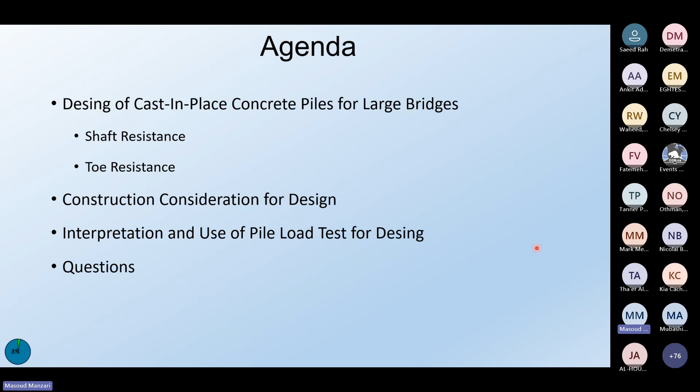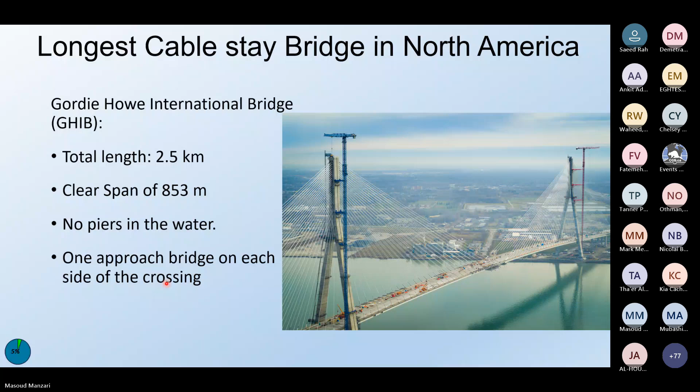The first project we're going to use is the Gordie Howe International Bridge, the longest cable-stayed bridge in North America. It's practically 2.5 kilometers long from end to end, with a clear span of 853 meters. There's no pier in the water, as you can see here, and there is one approach on each side of the crossing. It connects Canada in Windsor to the US at Detroit.

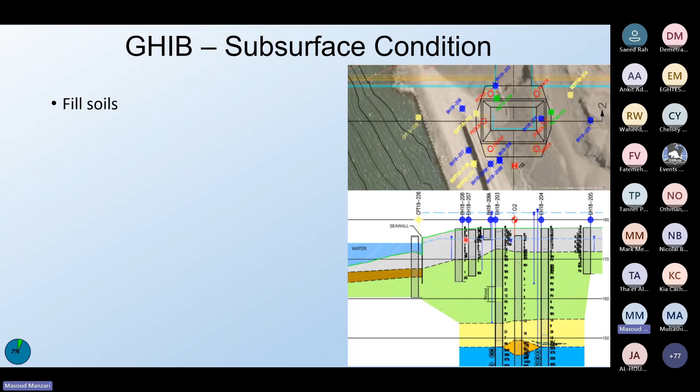The subsurface condition practically consists of man-made fill. This is one example on the Canadian side, and then very soft to very stiff, but predominantly very soft to firm clay, shown by green here, which extends all the way to 20 to 21 to 25 meter depth. There is 1 to 2 meters thick of hardpan, in this case compact sand. In some areas it's silty clay, till, and then it's all underlain by limestone bedrock.

Here is a sample of the tip resistance of the piezocone. As you can see, in the clay it's generally very soft to firm.

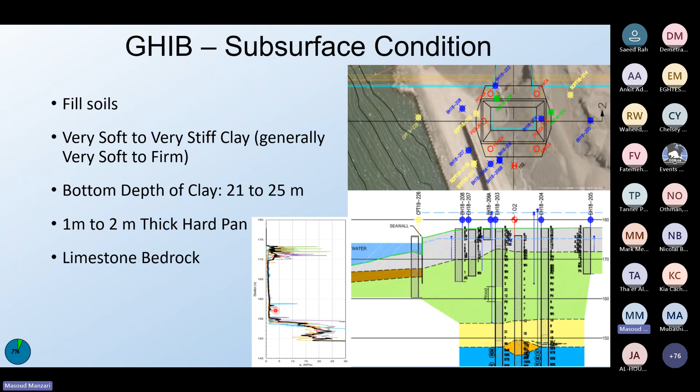The bridge has 2 main towers. Each tower is 220 meters high. Each tower has 2 legs, and each leg has 1 pile cap, supported by 6 piles. These are cast-in-place drilled piles.

On the Canadian side, the piles are 3.16 meters in diameter in soil and 3 meters in rock. On the US side, 2.92 meters in soil and 2.85 meters in rock. These differences are based on the availability of contractors' tools, since the contractor on the US side and the Canadian side were 2 different companies.

It was all designed by myself, but these minor detail changes are not a design related issue, it's a construction practicality situation.

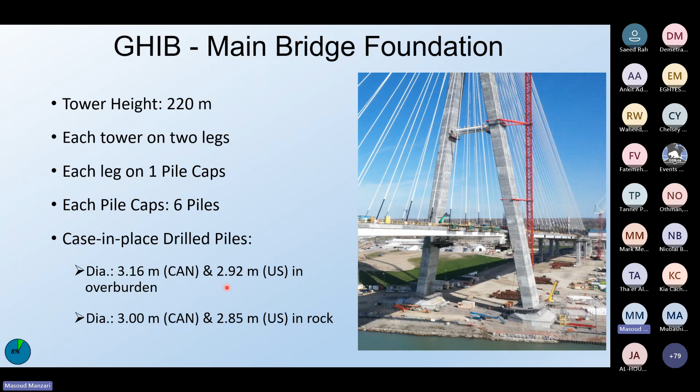The piles are about 36 meters long, and as I mentioned, about 30 meters of it is practically overburden with mostly fill and soft clay. The rock socket on the Canadian side is 4.5 meters long, and on the US side is 7 meters long, which we'll get to in the future, why that happened.

The design bearing capacity of each pile is 260 meganewtons factored in compression and 7 meganewtons factored in tension. The design assumes that all the resistance, whether in compression or tension, comes from the rock socket, not the soil. The soil provides lateral resistance.

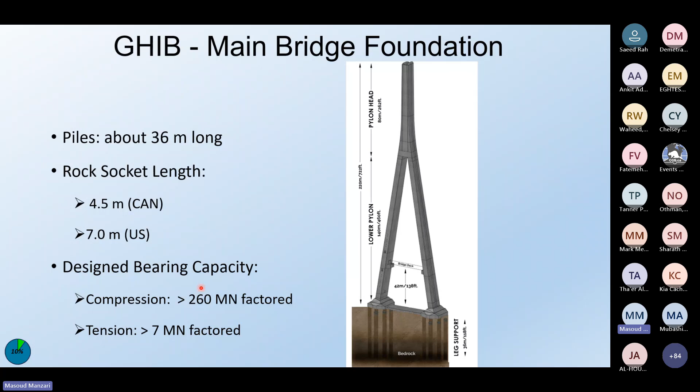To give you some idea about what it takes to construct large diameter piles like this, I'm going to quickly go through a few pictures of the construction stage just to get a feel for it.

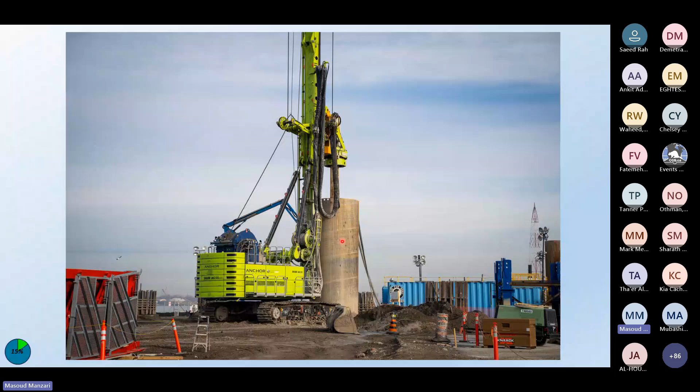Here you can see the height of the steel casing, which was used because we have artesian water, and we needed to make sure the fluid inside stayed above the groundwater level, meaning it had to be higher than the artesian pressure. That's the scale of the steel casing, this one for the pilot test.

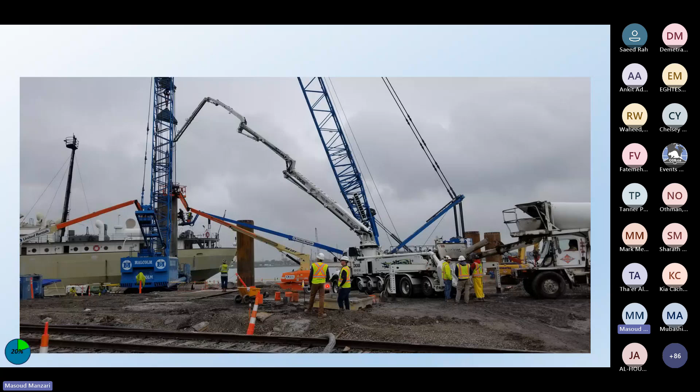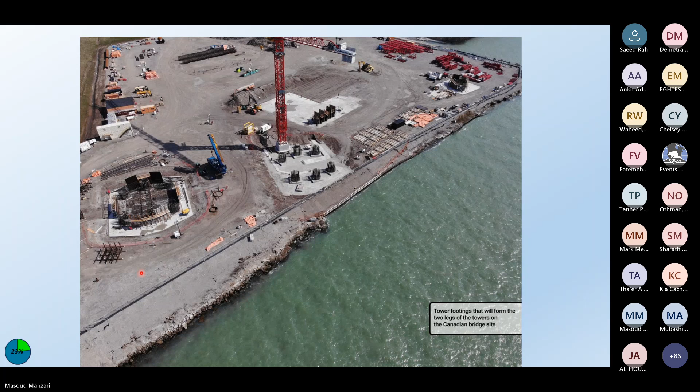You may see the O-cell test here, which we'll get to later. These are from actual construction, showing what's required for slurry and slurry recirculation, and what it takes to place the concrete inside. Here are a few piles during excavation, completed, and this one completed and cured. That's an overview of the pile caps, almost all completed.

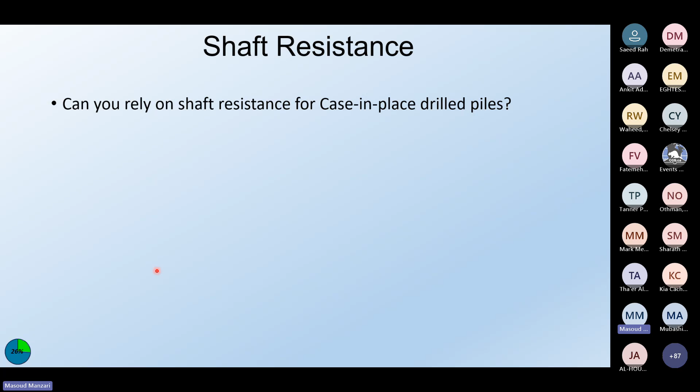Now we're going to discuss shaft resistance. Can you rely on shaft resistance for cast-in-place drilled piles? This question may sound ridiculous to some, who say of course we can rely on it. But I've had enough conversations with people who genuinely believe you cannot rely on shaft resistance for cast-in-place drilled piles in soil, because they believe drilling causes stress release and therefore you cannot rely on shaft friction for drilled piles. This is not a correct statement, and I can see where people are coming from.

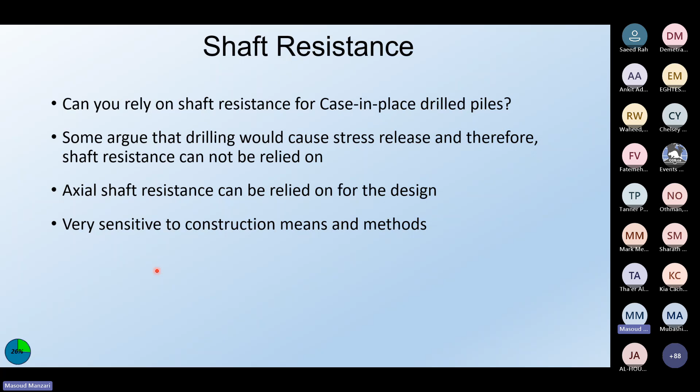I'll show a couple of examples of how things could go wrong, but you can easily rely on shaft friction. Shaft friction is very sensitive to construction means and methods compared with toe resistance. But in general, for equivalent load resistance between toe resistance and shaft friction, you get less settlement, and it is less sensitive to imperfections of the bedrock below the toe.

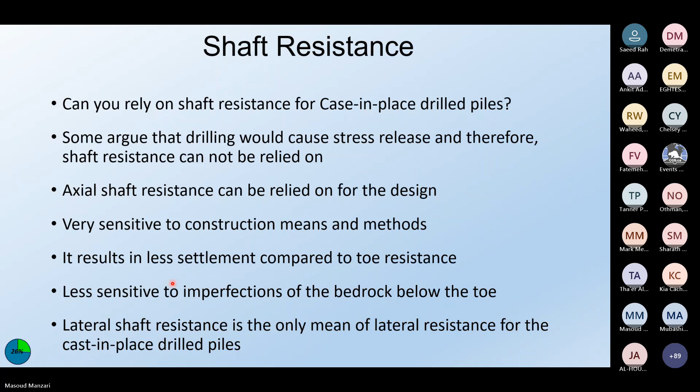And lateral, shaft resistance provides lateral resistance for cast-in-place piles.

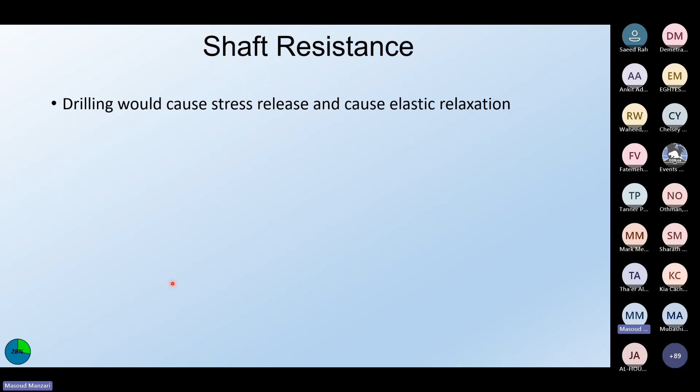Yes, it is correct that drilling causes a stress release and elastic relaxation. The key point here is elastic relaxation. But all of that gets compensated by the pressure of concrete.

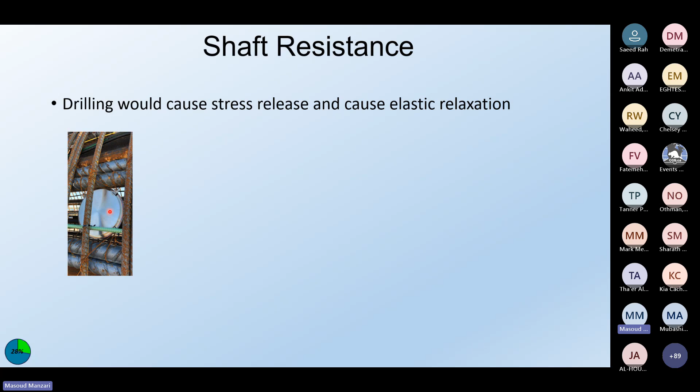For a couple of projects, we installed pressure cells inside the steel cage, and this graph shows what the pressure cell recorded. This high pressure here is practically when the steel cage was installed inside the drilled shaft. This is the hydrostatic pressure of water or slurry at that height.

After a few hours, concrete placement starts and the pressure increases. If you look at the angle of this pressure increase, it's very consistent with concrete having full fluid behavior. When you place the concrete, it applies a horizontal stress equivalent to a fluid with a density of 24 kilonewtons per cubic meter, which is even more than any horizontal stress already in the soil. It completely recovers the stress release.

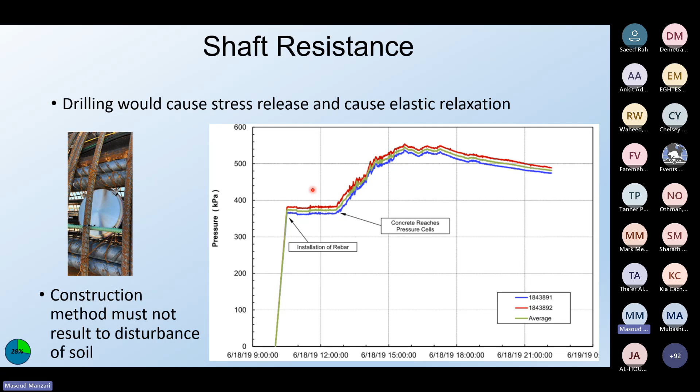In this case, by the time the concrete placement is finished and the concrete starts curing, you get some reduction in stress due to shrinkage. Another point to convey is this liquid behavior lasted for many, many hours, which we'll explain in the next slide. But as long as the construction means and method don't disturb the soil matrix, and we only have elastic relaxation, the pressure of concrete recovers all the stress release, and you get full shaft friction.

What is important is you don't disturb the soil, and also your concrete has the right workability. Plus, the concrete has the right workability retention, meaning the concrete at the bottom is still fluid by the time you finish placing all the concrete at the top. That's very important, and I'm going to show you an extreme case of the lack of workability or workability retention.

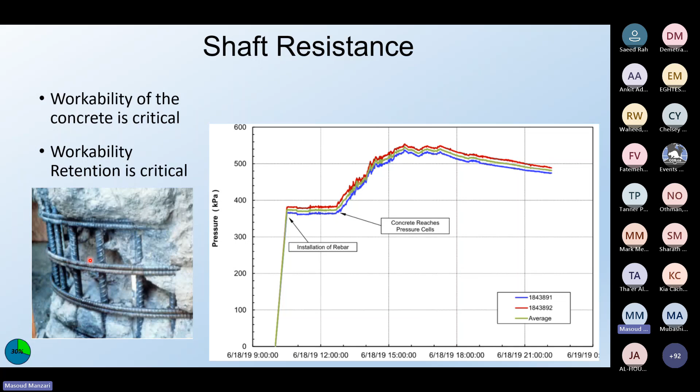Is if the concrete is not workable enough to pass through the cage. This is an example - you don't have any shaft friction. Therefore, yes, you can rely on the shaft friction, but that's subject to proper construction means and method.

Shaft resistance in soil and rock. When it comes to the shaft resistance in soil, permanent casing, even if it doesn't have overcut, it still leads to lower axial shaft resistance. And one reason is you don't get the recovery of the stress from the concrete.

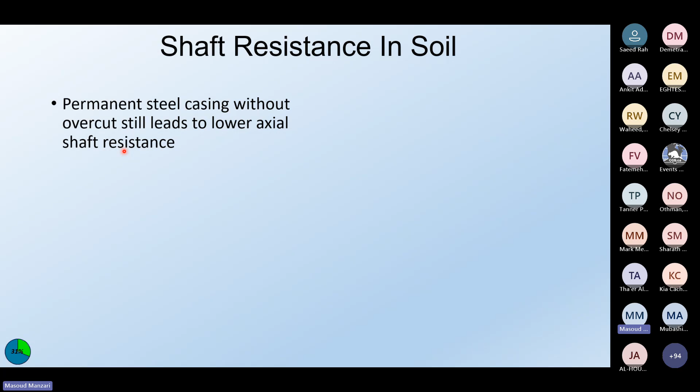Here is one example. We had the pile load test in the project. These values are the actual shaft resistance within the soil when we have the steel casing, even without any overcut. And these two are two conventional methods to establish the shaft friction in the similar soil with the same geotechnical properties. As you can see, the steel casing, the permanent steel casing has reduced the shaft friction considerably. And then using a permanent steel casing with overcut, it's an absolute no-no because it completely ruins your shaft friction and it softens your lateral behavior.

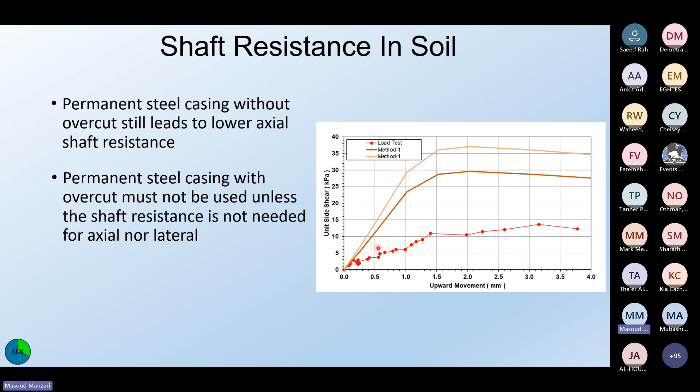Now, when it comes to the shaft friction, something that affects it after everything else is taken care of, meaning the workability and everything else - another item that affects the shaft friction and ties to the construction means and method is the roughness of the drilled shaft, meaning the rougher the drilled shaft, the sidewalls, the higher shaft friction you get. This is shown in here.

Both theoretical, which is this equation, and actual test, and it showed itself as piles having this identical roughness versus having different diameter. What does this translate to - the shaft reduction, ultimate shaft friction reduces as the diameter increases, assuming the same roughness.

And here is the ratio between the production shaft to the test shaft. As you can see, when it is less than 1, as the test shaft to production shaft diameter is less than 1, the roughness of the drilled shaft, the effect of the roughness in the drilled shaft in the bedrock is more than the effect on soil.

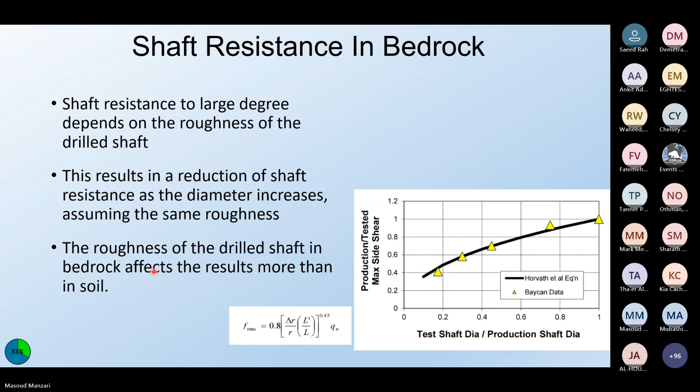I'm going to use another project. These beautiful bridges are part of the Portland project in Toronto. There were 4 bridges constructed with 3 different contractors. Therefore, we have one pile load test for this bridge done by one contractor, another pile load test at this location to cover 2 bridges, and another pile load test for a different contractor for a different bridge.

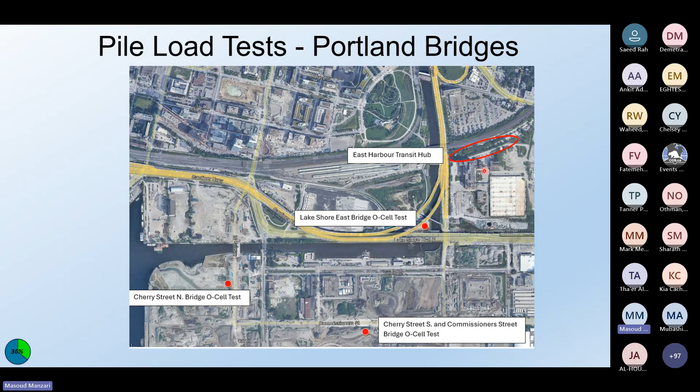And I got the result of a pile load test for a different project from a friend, and we're going to compare this in here. Therefore, we have 4 pile load tests. These 3 that I was involved with are done by 3 different contractors, 3 different equipments. I can tell you even 3 different tooling to drill the holes, but they've all been constructed with the strict specification. Therefore, everything you can say was done properly.

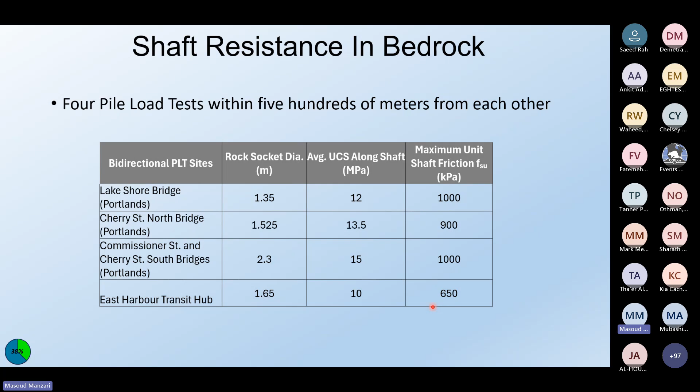And as you can see, the pile load tests are 500 meters from each other. For these 3 where the construction was very consistent, the ultimate shaft friction is almost identical for all practical purposes. The UCS is very close for these 3 locations. For the 4th project, the UCS is less, and we get even slightly less ultimate shaft friction in here. This might have something to do with the construction means and method effect. Therefore, the shaft friction is tied to the means and method a lot - to the tooling, to the roughness, the workability, and all come to the effect.

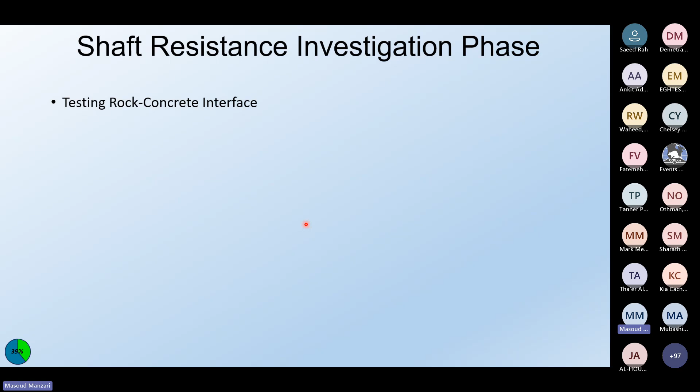Now, during the investigation phase for some of these projects, we actually started developing a test, as far as we know, for the first time - a test to study the friction and the resistance between the concrete and the rock. In this test, we took a rock core, cut it in half, in a vertical line, cast concrete on it, and then started putting this sample in a direct shear test, like that, and started shearing it to get us some idea about the ultimate friction between the rock-concrete interface.

And the idea is when you do the saw cut, that's almost the lower bound of roughness you get in your rock socket. During the actual construction, we expect to have higher roughness.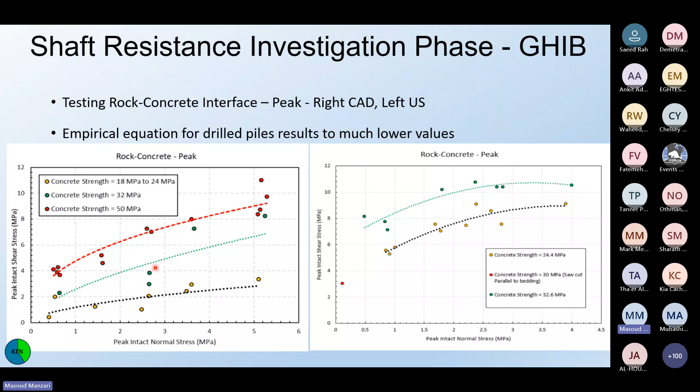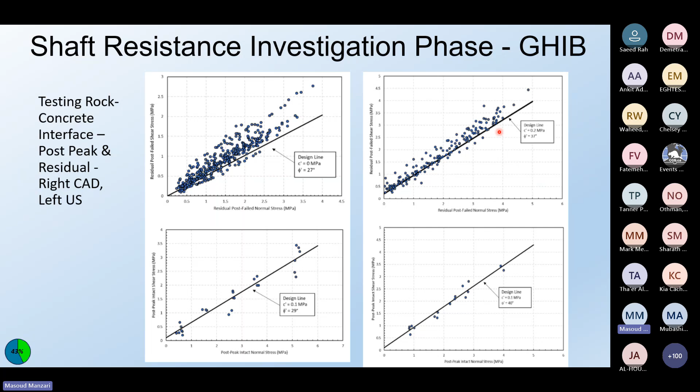The test that I mentioned was done, and also the residual state. As you can see, again, there is a big difference between the post-peak on the Canadian side and the US side. Between post-peak and residual, there is a 2 to 3 degree reduction in the friction. We use all of that in establishing the design, and I'm going to get to how it compared with the actual results.

Now, on the toe resistance - again, I've heard some of my colleagues in the past say you cannot rely on the toe resistance. Why? Because they say in sandy soil, you disturb the soil, you get almost no resistance at the toe. Or some people are worried that you can't verify the cleaning at the base. I think most people think from the age when we sent an inspector inside the drilled shaft to inspect the base - that doesn't happen anymore.

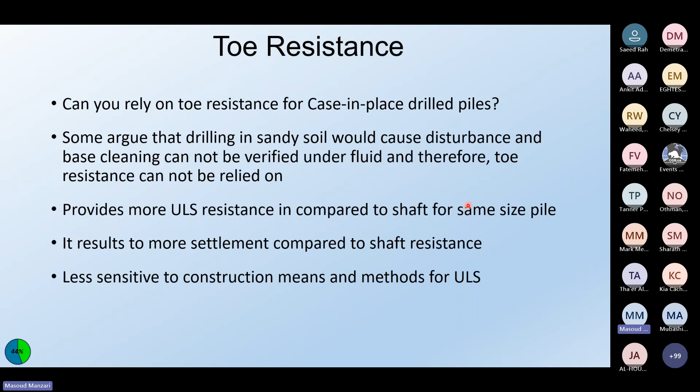However, we have very reliable tools to check the cleaning. Therefore you can rely on the shaft friction, so you can rely on the toe resistance. The toe resistance provides more ultimate capacity resistance compared with the shaft friction, everything else being equal. But at the same time, for the same load level, it provides more settlement, therefore has a softer behavior. It's also less sensitive to the construction means and method when it comes to the ultimate capacity, but it's still sensitive when it comes to the serviceability limit state.

And it's tricky to understand or establish when it comes to the condition of the bedrock below the toe, whether it comes in the form of fractures, voids, or hard seams. We'll get to one example here - this is the same Portlands project, with an additional test where we had four pile load tests. You can see that below the tip, the rocks are very comparable.

They have very close RQD, very close UCS. Even when it came to the shaft there was more difference between them - if you recall this was 10 - but now below the tip of the shaft, they're very close. And the unit end bearing is very variable, which is interesting.

Some of these never achieve failure - they just max out to the capacity of the test. Some achieve failure, some max out but are close to failure, so you can call that the real failure stress at the toe. And this one didn't achieve failure, and still between even these two, the values are very different. When you look at their settlement at 50% of failure, you can see the results are closer to each other, but not for this one.

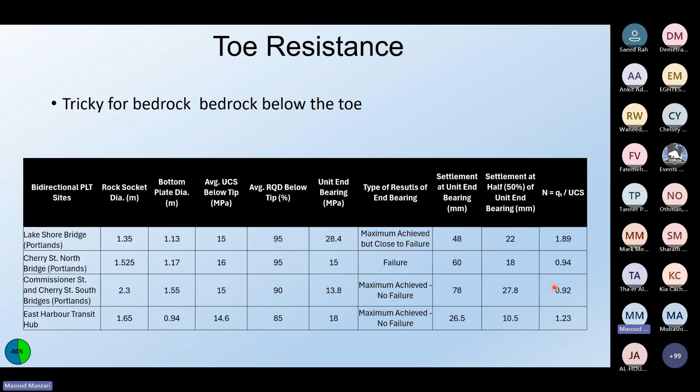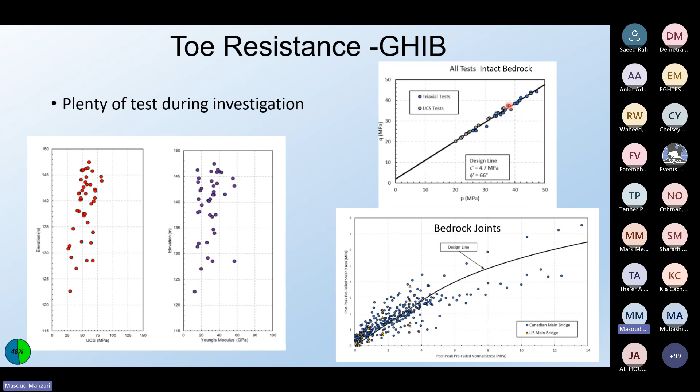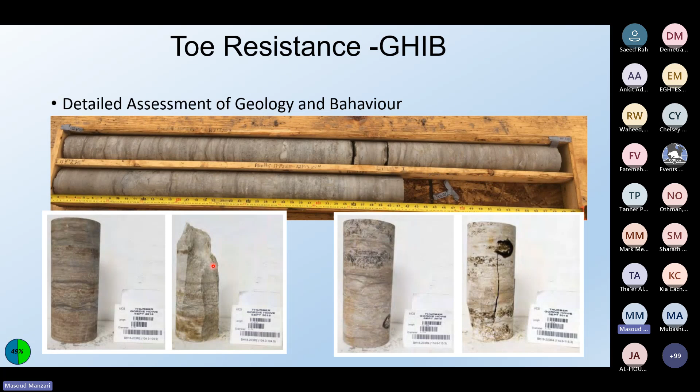For the Gordie Howe project, we had lots of tests - lots of UCS testing, lots of triaxial testing, and the data were processed together. We even tested direct shear tests on the natural joint. Every single UCS test was analyzed for the style or type of failure, because each failure can tell you a story about the rock behavior. We even conducted a numerical simulation of the rock socket - this is not what you typically do in day-to-day bridge work, but for a large bridge like that, it was warranted.

We provided comments that these compression results were excessively high. They sent us a list of their projects in the US where the design ULS value was not even remotely close to this, and they were kindly telling us that we were crazy.

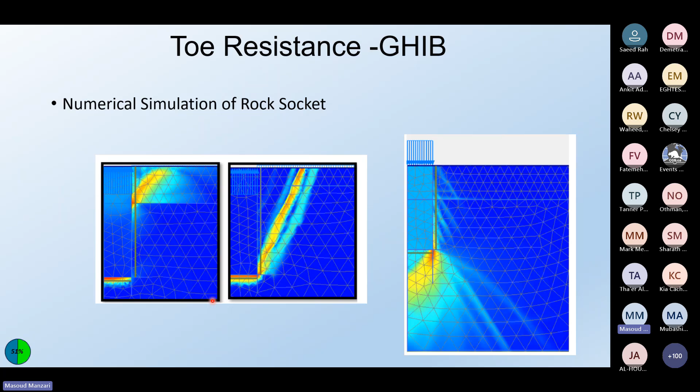But we were confident in the result, and we went to the next phase of the project to conduct the pilot test. We did two pilot tests, one on the Canadian side and one on the US side, because we had two different contractors, and as I said, the performance of the drilled pile depends on the contractor's means, methods, and quality. So we had to do two. There were also some changes in the bedrock; as I said, one of them was oily. The rest of the properties were identical.

The tests were planned to apply a total of 320 meganewtons, 160 upward and downward. At the time, it was the largest pilot test in North America—it may still be. I don't know anymore. It included a 24-hour creep test.

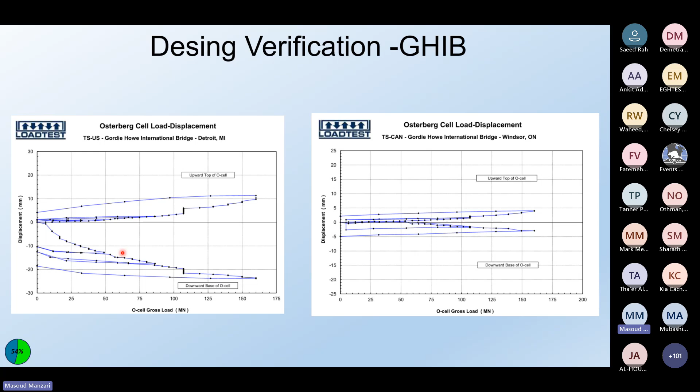The tests were done successfully. We achieved the maximum load of the jacks in the O-cell, and there was no sign of failure. The right is the Canadian side, the left is the US side. Here is the mobilized shaft friction at different parts of the rock socket. On the Canadian side, it didn't even get close to failure, around 4,500 kilopascal. On the US side it's almost failing and also moving more.

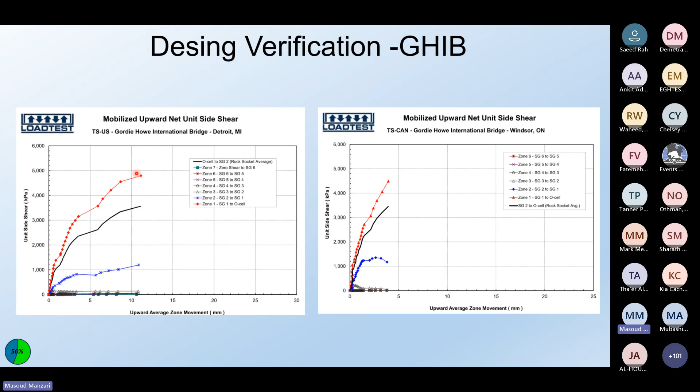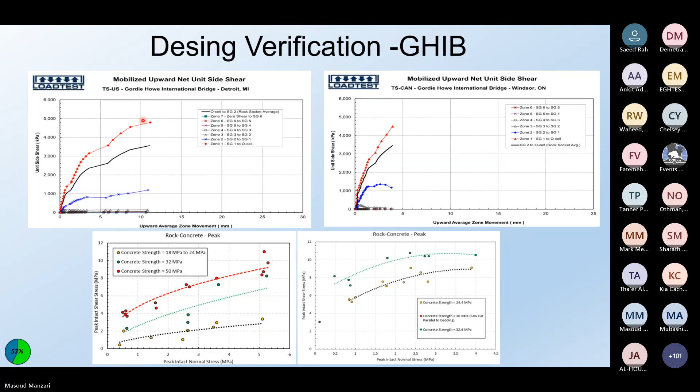To refresh your memory, when we tested the concrete-rock interface in the lab, there was good consistency on a couple of things. One was that the behavior on the US side was softer with less ultimate capacity—shaft friction was very consistent with this result. In the end, all of the design assumptions were verified and proven correct.

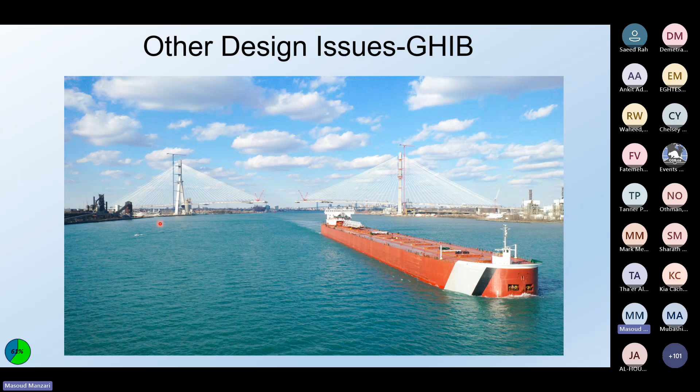There are other aspects of the design for this type of bridge. I'll go through one example. This photo reminds me of the unfortunate events last year in Baltimore, when a ship hit the pier and the bridge collapsed. In Gordie Howe, we didn't have any pier in water, but as you can see, the piers are very close—almost 10 to 15 meters behind the water line—and a ship hitting there is going to impose some load. This is not the type of analysis conventional structural software is capable of doing.

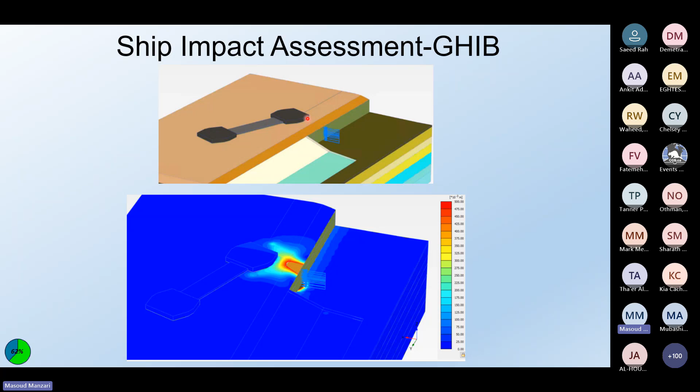If the pier was in the middle of the river, the structural engineer could handle that easily, but now we had to step in and help the structural team work together. We ended up analyzing and providing full soil-structure interaction models, applying the ship impact, and analyzing the deformation and load applied to the piles due to the ship impact, and provided that to the structural engineer for use in their design.

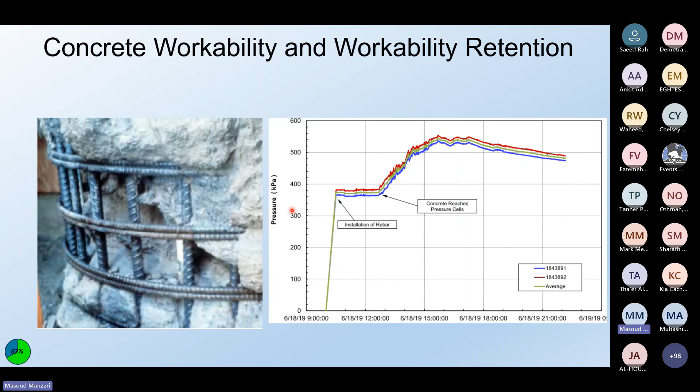Now let's talk a little bit about construction considerations for the design. We talked about workability and workability retention—I'm repeating it because it's very important. If you don't have proper concrete workability and workability retention, your shaft friction will be jeopardized, and on the structural side, your durability is gone. Here's another example, for a project in soil.

This project involved three pilot tests, all with 1.2 meter diameter. The pilot tests were 7 meters away from each other in a triangular pattern. They were done by the same contractor; two pilot tests were done by the same crew, and they all used the same construction methodology—the dry drilling method, or plug drilling method as I call it—which we'll talk about a bit in the next slides.

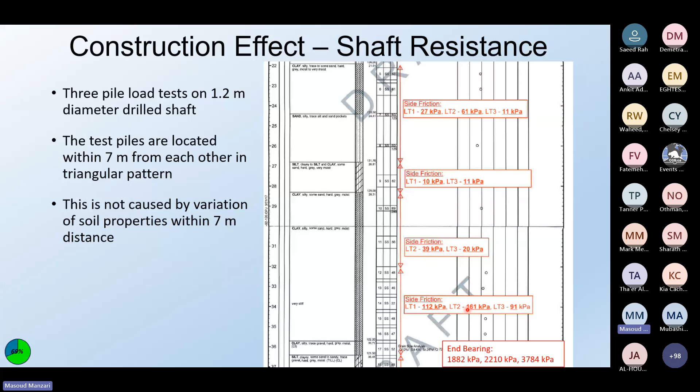Now about the toe resistance. In Gordie Howe, we use a SQUID test. A SQUID test, just to give you a very high-level introduction, is equipment that involves 3 probes. Each probe has a measurement in here, like a piezo cone measurement that measures force and displacement. They're very sensitive. They're pushed at the base of the shaft, and they tell you how much sediment you have.

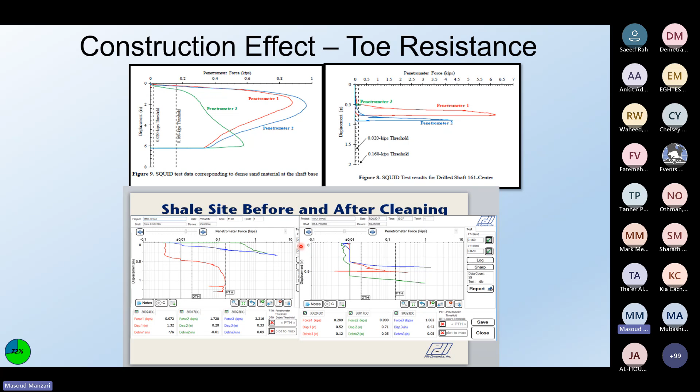Here is another example of rocks. This is not the Gordie Howe project, it's a different project. Here is the result of the SQUID test in a rock socket before it was cleaned properly, then it was cleaned and this was the result, and it was cleaned again, and then you can see the results. It was completely different. Here is the test result on the Canadian side and the test result on the US side. Therefore, the thickness of the sediment that we saw implies they are the same, but they're actually very different. Hence, we have to be careful that the conventional values used to interpret the SQUID test so far in the industry are more tuned for soil, not for bedrock, and some adjustment is required to get consistent results.

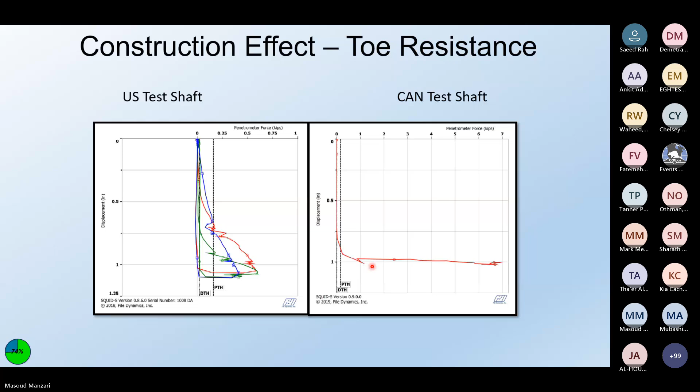And as I mentioned, we're going to talk a little bit about the dry drilling method. Dry drilling method is something some contractors use. It involves drilling your drilled pile into wet non-plastic soil, like silt, sandy silt, silty sand, and they create a plug, maybe 2 meter, 3 meter plug even, and they keep the steel casing 2-3 meter below the plug until they reach the toe, and they think everything's fine because they don't see any problem.

Here are a few pitfalls about using the pile load test for drilled piles. I mentioned the O-cell test. I'm going to provide a little bit of background, a high-level overview of the O-cell test.

It's the practical way of testing drilled piles. It involves installing a jack at the middle of the pile and applying load upward above the jack and downward below the jack. Applying it upward to the top, it mobilizes shaft friction there. Applying the load below the jack mobilizes shaft friction upward and end bearing at the bottom.

It's a very cheap, very effective test for drilled piles. Generally, in the case of a rock socket, this jack is at the bottom because you want to put the jack at the location where the load at the top and the bottom fail at the same time.

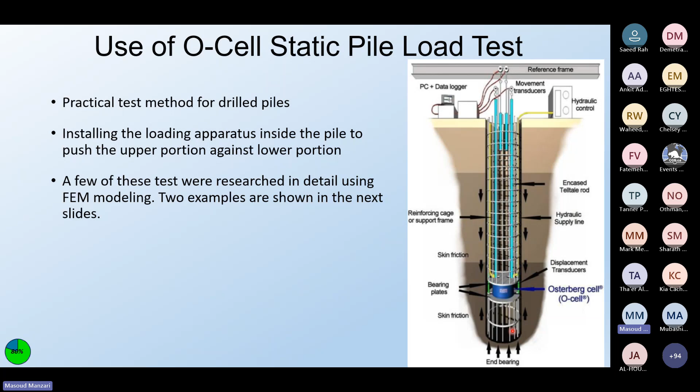In order to investigate and research some of the items I'm going to discuss, we wanted to run FEM models, but we had to make sure these FEM models are, for lack of a better word, perfect for the purpose. You cannot just run a finite element model of a pile and get the load displacement at the top properly done if it doesn't give you proper load distribution with depth or mobilized shaft friction at different load levels. The model should be as accurate as possible to be relied upon for generalized research.

Therefore, for this particular test in soil, this is proof that we get a very good match with the load distribution with depth at different load levels, as well as the load displacement upward and downward, and the mobilized shaft friction at different levels.

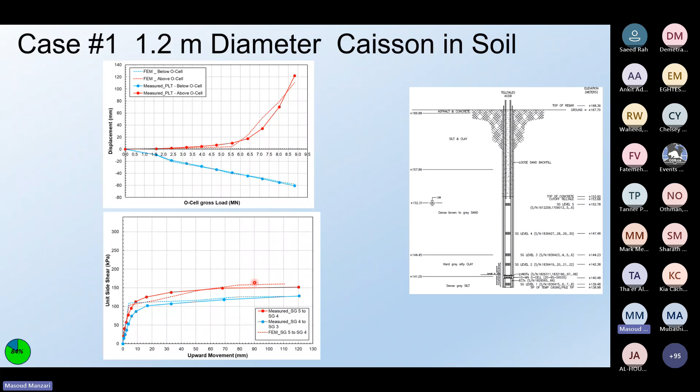This was one of the tests we used, this one in Gordie Howe. Again, that's the upward movement and the mobilized load from the test versus the modeling, and here at the base, a good match.

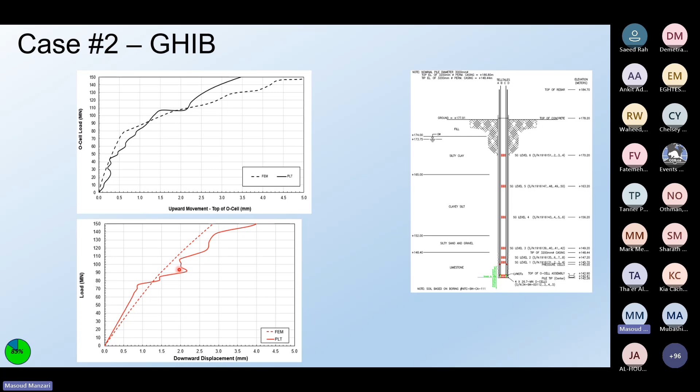We use all of that to study how we're going to use the test results for the actual pile. First, in tension: the more common mistake I've seen some folks make is thinking that if you get an ultimate shaft friction from the O-cell test, you can directly use it as tension resistance.

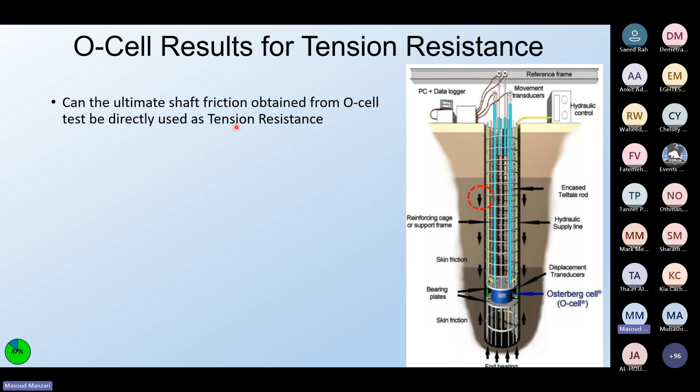Why do they think that way? Because when you do the O-cell test, the mobilized shaft friction is downward, therefore it's like the pile being under tension. Hence they think we can use the result as is, whatever ultimate shaft friction we get from the O-cell test, for tensile resistance. That's actually not correct, for a simple reason.

When you do the O-cell test, this is the load applied to the pile, and as you can see, the pile is still under compression. Due to the Poisson effect, the pile is horizontally expanded. If you recall, we talked about roughness, so horizontal expansion affects the normal stress and roughness comes into effect. Versus in tension, tensile loading, the pile itself is under tension, and you have horizontal reduction of the cross section. Therefore, you have a reduction of the normal stress on the shaft. Both of these happen despite the mobilized shaft friction being downward in both cases.

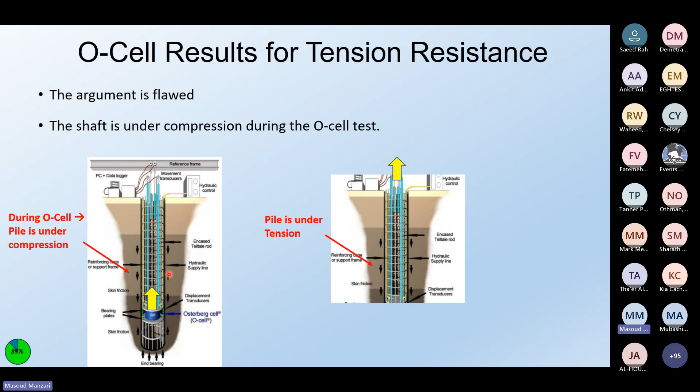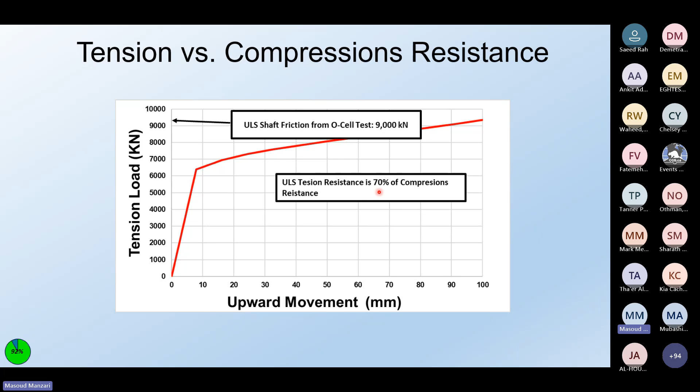Same thing for soil. In this case, the percentage is 70%, so less reduction as expected, but it still is not the same.

Another issue that comes into effect is conducting an O-cell test for a certain length. Let's say you have a 3 or 4 meter rock socket and you do the test, and then suddenly you want to use that to design a 6 meter rock socket.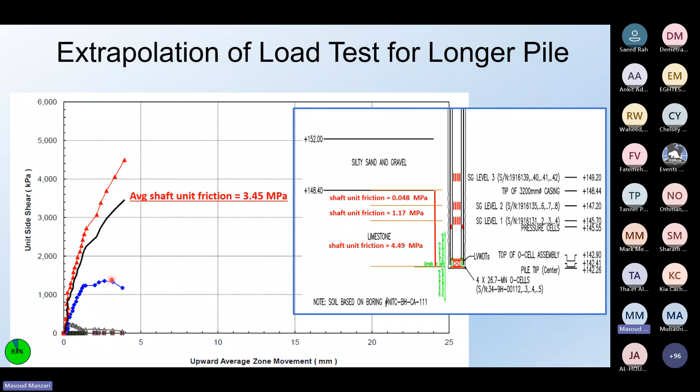Generally, when we do the O-cell test, we try to put instruments like strain gauges within the test to provide us axial load, and from there we get the average mobilized shaft friction at different zones. This is a sample: this is the average friction for the entire rock socket, and then for the lower zone you get this value, for the upper zone you get these values. What some folks do when they want to increase the design to a production pile is just assume whatever was the highest value, like 4.49 for this lower zone, and apply that to come up with a longer length for the production pile.

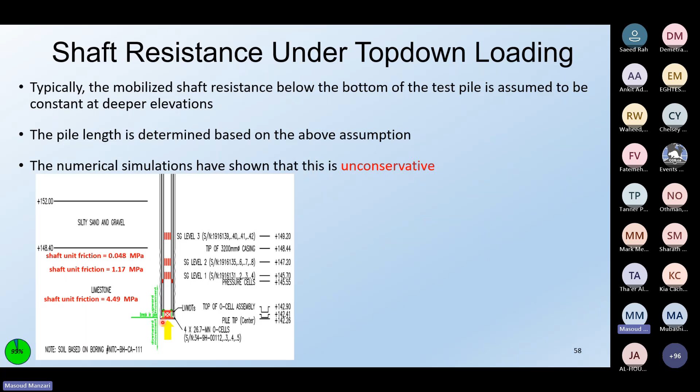This approach is unconservative, for a simple reason. In the O-cell test, you have load applied upward in compression. Here you have higher axial load, here you have lower axial load. Hence, here you have more lateral compression.

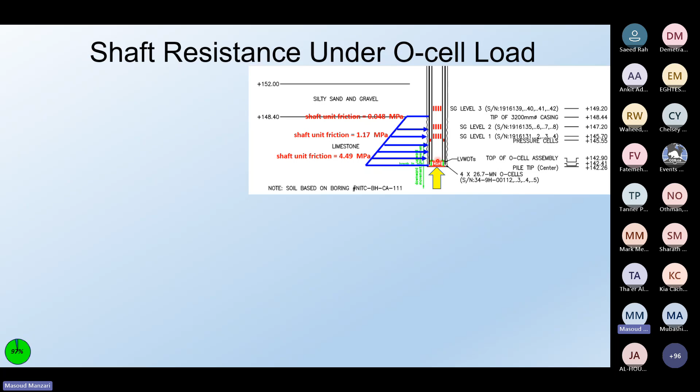Confining is more at the bottom, plus you generally have better rock quality at the bottom. Therefore, two items come together - higher confining and better rock quality - to give you the total mobilized load here versus increased shaft friction. In the real top-down loading in the real piles, you have higher confinement at the top.

And generally lower rock quality at the top, becoming better with depth. Hence, if you have a slight deviation between the actual production pile and the O-cell test, you can use the result as is. But if there's a large difference, you better pay attention to these possible changes in the rock socket. Another thing to consider is most of the time the rock sockets are not actually behaving like deep foundations - the depth to diameter ratio is not close to 5. All of that affects interpreting the test results.

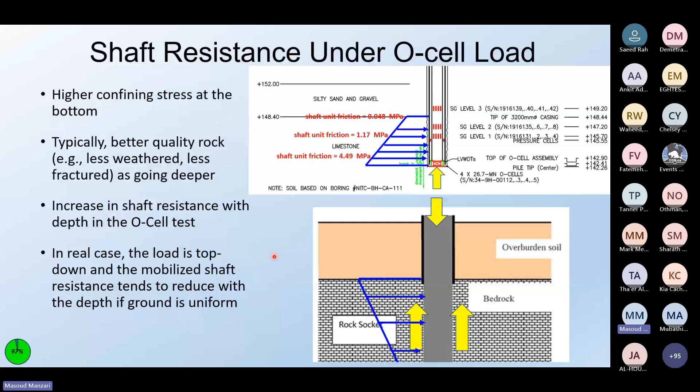Another angle is coming back to the need for base cleaning. Even if you're designing purely shaft friction piles, not relying on end bearing, the base resistance still has some effect, because when the base provides resistance, your shaft friction increases. We simulated a scenario with a void at the base and a soft base, and as you can see, there's a 20% difference in ultimate shaft friction because the base providing resistance increases the lateral confinement, increasing your shaft friction.

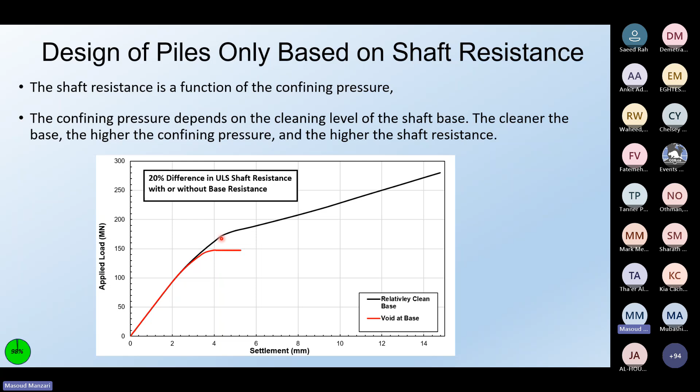At the end, what I'd appreciate everybody learning from this is that construction means, methods and workmanship have a profound effect on the geotechnical resistance of cast-in-place piles. It's not just about the geotechnical property of the soil or rock - these two come together. As a designer, particularly for large bridges with heavy loads and sensitive foundations, you need a clear understanding of construction methodologies. Your design must be very consistent with the construction specification.

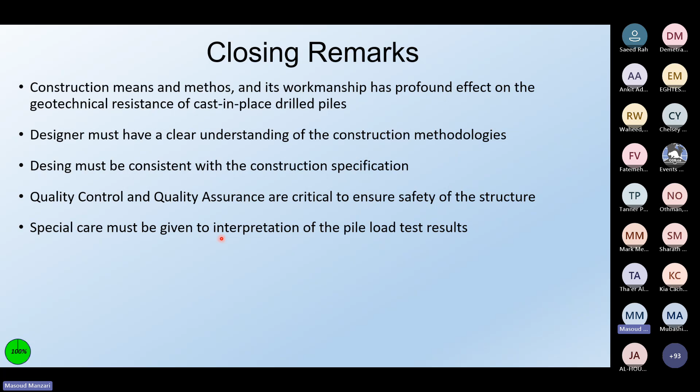Issues like, can you have a permanent casing? Whether the permanent casing can have an overcut? How does it affect your shaft friction, lateral, axial? Quality control is one of the most important items. And you have to pay special attention to interpretation of pilot tests, particularly if you deviate a lot from the parameters of the pilot test, whether it's diameter or length, between the pilot test and the production piles.

Thank you for all of your attention.

I think we have some time for the questions, Leonardo. This is great, thank you so much. Really appreciate your presentation, Masoud. Wow, what a size of foundation. This was incredible just to hear about it. Thank you, well, we do have two questions already prepared here.

I'm going to read the first one. It's from Sam. They're asking, to assess the interface friction between the rock and the concrete, did you consider doing a direct shear test instead of triaxial? If yes, any practical or technical reasons to choose the triaxial test?

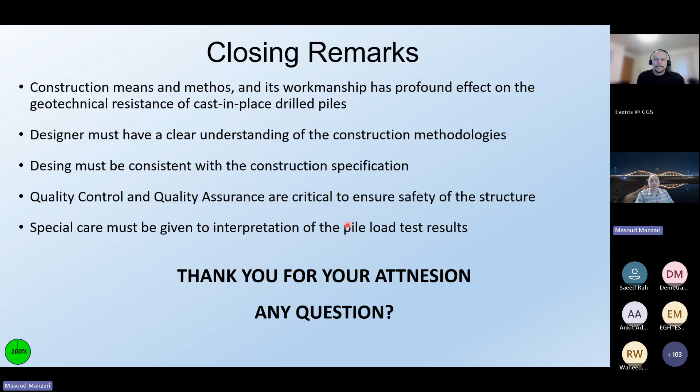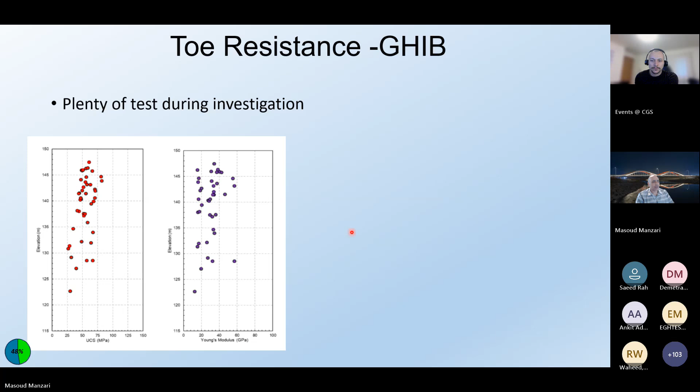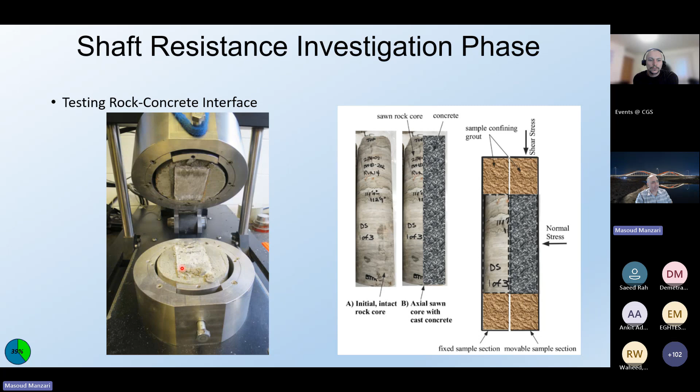Actually, I have to say, Sam, the interface test - let me see if I can get back in here - the interface test was a direct shear test. I'm going fast to find it. Here, okay, it was a direct shear test. We cut the core in a vertical line, we cast a cylinder, and then it was a direct shear test. I had to rotate it vertically to show the orientation of the sample versus concrete, but as you can see, this is a direct shear test apparatus - this line is practically this line. Therefore it was a direct shear test. We did the triaxial test for the intact rock and some of them for the natural joints, plus lots of direct shear tests on the natural joints.

Thank you for answering. More questions are coming, we probably won't have time for all of them. So if you are a young professional, please feel free to type them, and all the questions unanswered during this last 12 minutes that we have, we will be replying over email. So the second question here is from Daniel.

What method did you use to approximate the pile compression and tension capacity for the design prior to the load tests? And what methods did you use to calculate the spring values for designing the pile caps?

Oh, very good question. Going back to the slides, of course I'm not going to go through it now. For the Gordie Howe bridge, which was a very large bridge, we used all the tools - anything from empirical test methods to calculate the capacity, and then verified that by running numerical modeling of the rock socket, as I showed on the slides. Those were very important to get there, and then we verified that by the pilot test. Of course, that's not something you do for every job or even every large bridge job, but that was an exceptional project. It's required - for the other piles, like the Portland bridges, we just use the empirical method, but we know by experience what method works best in that rock formation, plus previous experience in the local geology. We used that, and then all of that was verified by the pilot test.

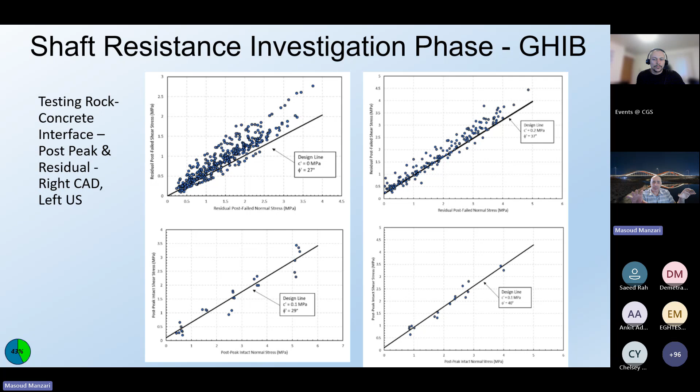What happens in the dry construction method comes into effect when we have non-plastic soil like sand or silt with an underground water table. As you excavate and go down, you have a difference between hydraulic gradients outside and inside your shaft. You don't see water gushing in because you have a plug, but these hydraulic gradients try to... let me get to that slide too.

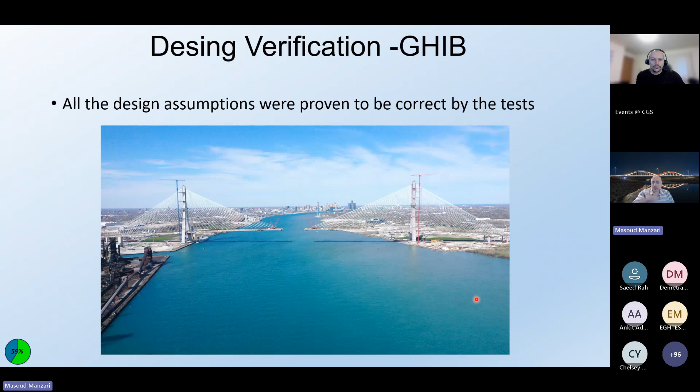This tendency has a pull to bring the soil into the shaft because of the hydraulic gradient. You cut this and remove it as you go down, so you don't get a feel for what's happening. But the tendency to come in already starts disturbing the soil even beyond the edge of the pile. By the time you get to the toe, at the design toe, you have zero plug because the steel casing doesn't go below the design toe. That's where you get the maximum reduction in the soil and disturbance, which affects your soil properties a lot.

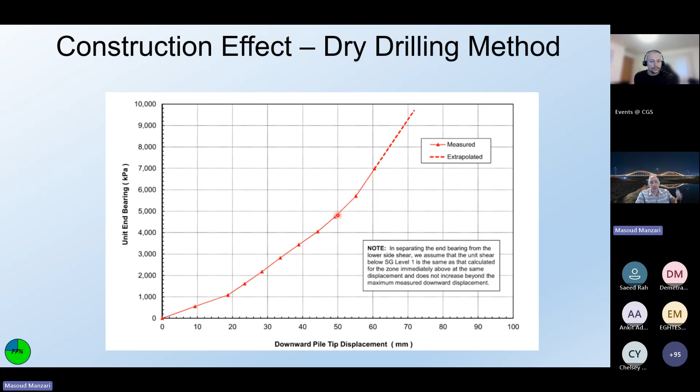As I showed here, generally in every pile test, if things are done properly, you see a little bit of hard behavior becoming softer - that's the type of behavior you like to see. In this case, we have enough disturbance that it's actually softer and becomes harder because you're compacting the disturbed soil. If you look at the FHWA guideline for drilled shafts, the plug method or dry drilling method is not even one of the acceptable methods in non-plastic wet soils.

Next question is, do you have any suggestions for frequent groundwater table variations on shaft resistance?

I'm not sure how frequent a variation you're talking about. In most of the projects I've dealt with, groundwater table variation has been 1 to 2 meters, like seasonal fluctuation, and you consider the highest one in your analysis. When you do the pile test, you can have some reduction because your effective stress reduces, but that doesn't seem to me a big deal to just incorporate in your back calculation of the pile test or in your design process. You just need to know what the variation of the groundwater table is over the lifetime.

Next question, would you revise the shaft and tip resistance discussions if the CIP is socketed in shale?